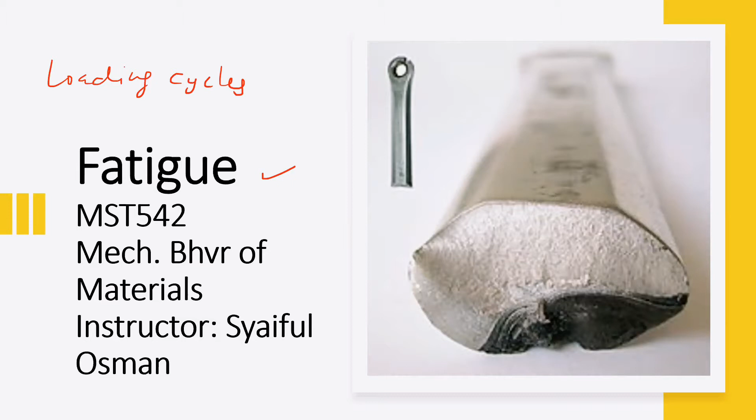Fatigue damage is among the major issues in engineering because it increases with the number of applied loading cycles in a cumulative manner and can lead to fracture and failure of the considered part.

Here is a brief history regarding fatigue. Beginning in the first half of the 19th century, mechanical failures were observed to take place in metals and materials subject to repetitive stress well below the yield strength. The theory came to be that the metal became tired or fatigued, hence the term fatigue or metal fatigue.

So how can we define fatigue? Fatigue by definition is a form of failure that occurs in structures subjected to a fluctuating stress. Among the key points to understand fatigue is that it can be defined as a form of failure that occurs in structures subjected to dynamic and fluctuating stress.

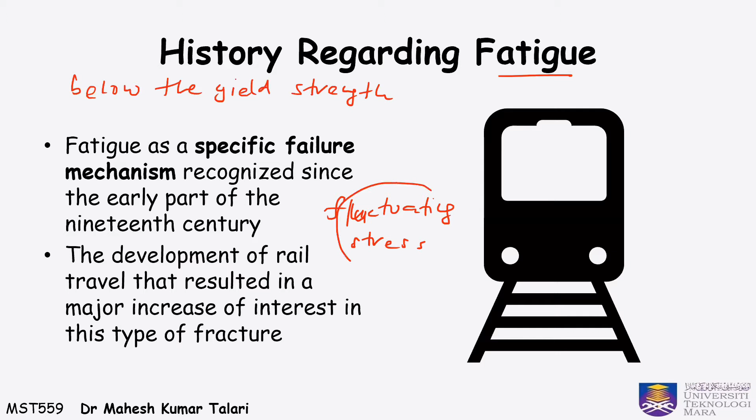It can cause part failure, responsible for about 90% of mechanical engineering failures. In addition, it occurs suddenly and without warning, and is brittle in nature, even in ductile materials.

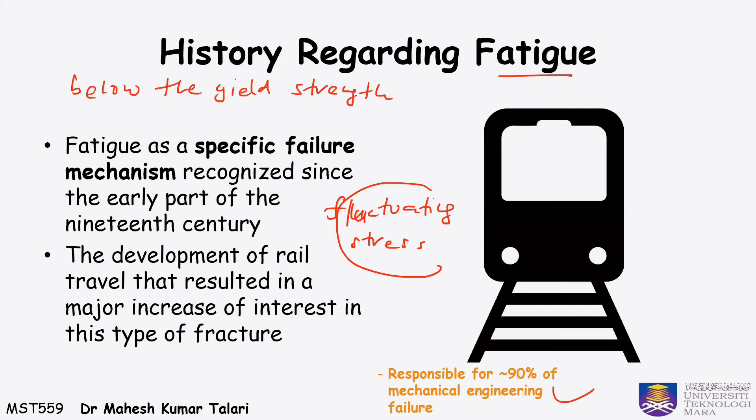For example, imagine a bridge with cars driving repeatedly over it. The number of cars in any given day might differ. One thing about fatigue you have to remember is that a part or material can fail even though the maximum stress the part is subjected to is much less than the yield stress.

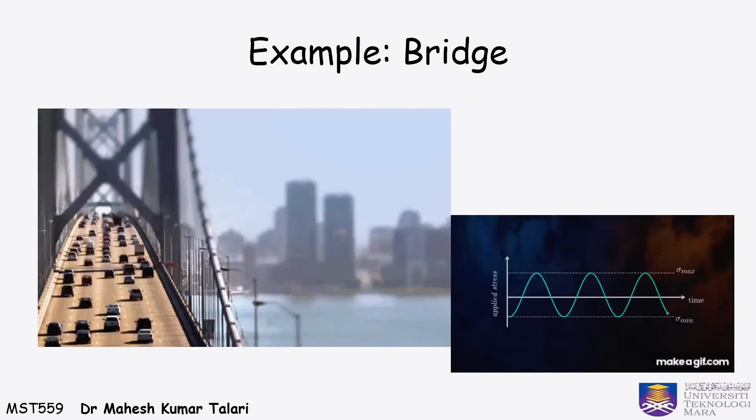So we can say that fatigue is forces equals f(t), where any forces that we apply over time will cause crack growth that will further promote premature failure.

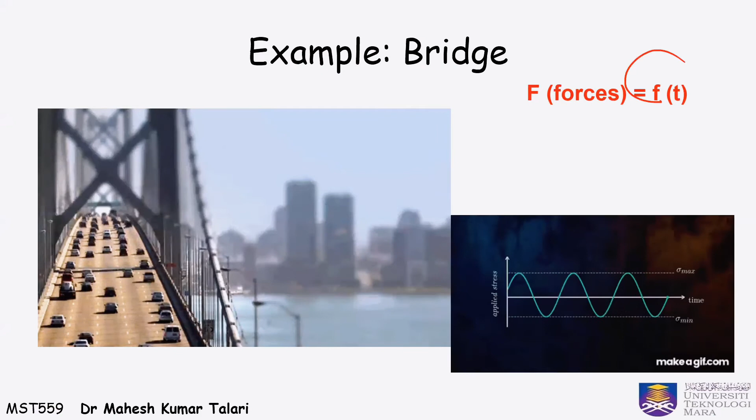So how does fatigue start? Usually we start with some kind of crack initiation. This can start by a tiny micro crack, or the way the material was arranged, etc.

At some point, we need a site for this crack to start to grow, and as our load varies over time, that crack is going to get bigger and bigger with each cycle. Eventually, this will proceed to a brittle style of fracture, and this could even happen for a ductile material.

Something like aluminium could suddenly fail with no warning. That is atypical for ductile materials, which usually exhibit a lot of deformation before failure.

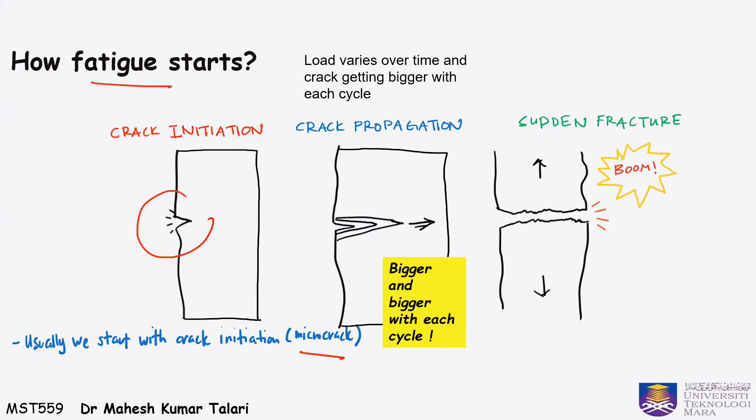So we can say that there are three stages involved in fatigue failure. The first step is where crack formation occurs. The second stage is where growth occurs, and finally the third stage is when fracture occurs.

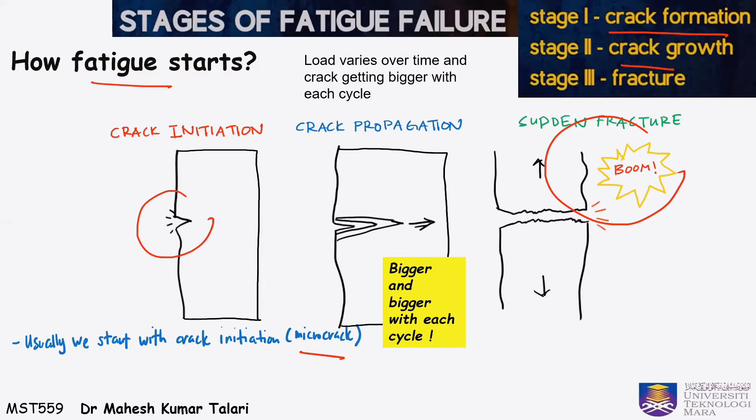Here are some important fundamentals if you want to understand more about fatigue. First, the terminology is fatigue itself. Fatigue can be defined as the lowering of strength or failure of a material due to repetitive stress, which may be above or below the yield strength.

Secondly, we have creep. We'll be discussing more about creep later. Creep can be defined as a time-dependent permanent deformation at high temperature occurring at a constant loading or constant stress.

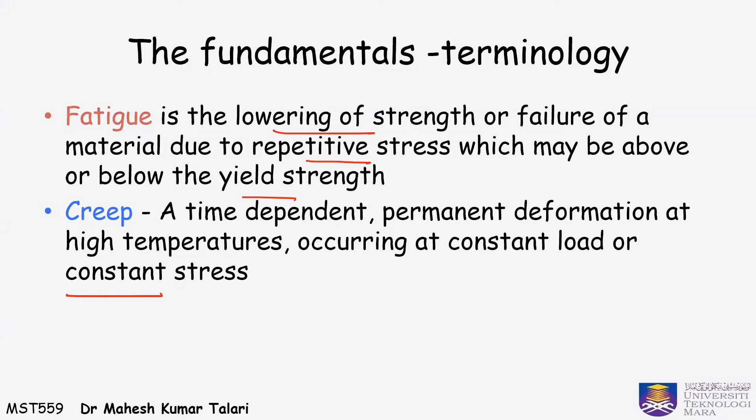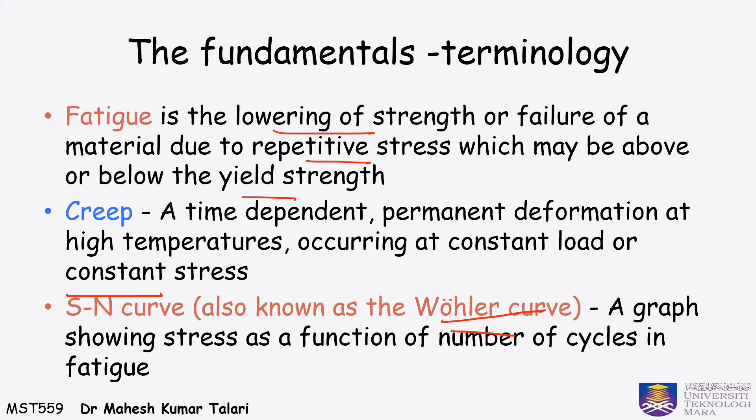You also need to know about the SN curve, also known as a Wöhler curve, which can be defined as a graph showing stress as a function of number of cycles in fatigue.

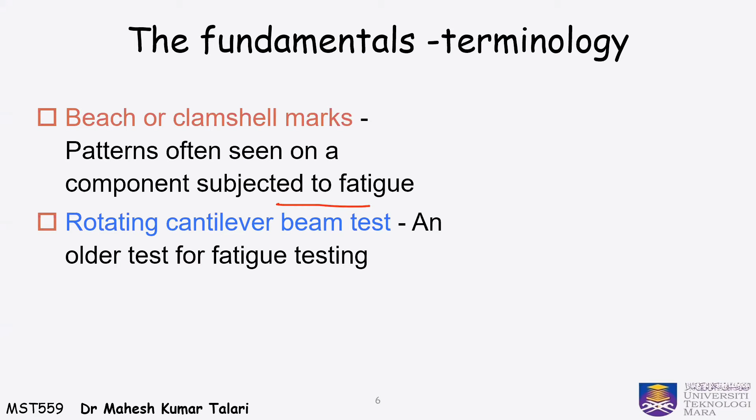You also need to know about rotating cantilever beam testing. This is a technique used for fatigue testing. Rotating beam fatigue testers are one of the oldest methods used to determine a material's fatigue behavior.

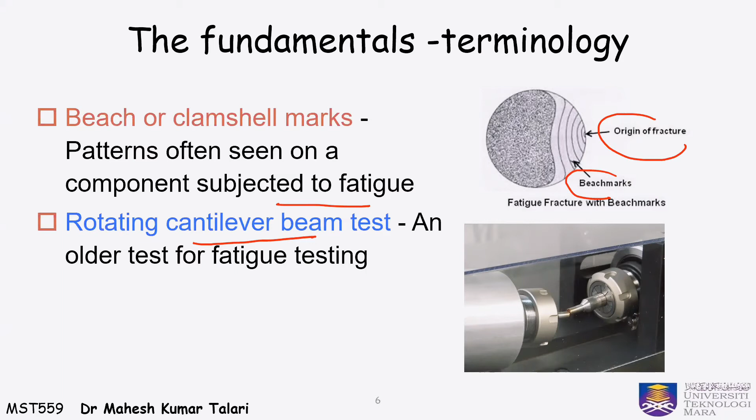So we already know that fatigue is a failure mechanism that involves the cracking or fracturing of materials and structural components due to cyclic or fluctuating stress. While we apply a stress, maybe in the form of tensile, compressive or torsional, crack initiation and propagation are due to the tensile component.

One of the interesting facts about fatigue development is that, as I've mentioned several times before, fatigue cracks can be initiated and propagated well below the yield strength of the material.

So how does fatigue failure look like? A fatigue failure is quite easy to identify, like what we can see in the figure here. The fracture surface, particularly near the origin, is typically smooth.

This fatigue crack always initiates at the surface, at stress concentration points such as surface defects, sharp surface features, etc. The surface becomes rougher as the original crack increases in size, and may become fibrous during the final crack propagation.

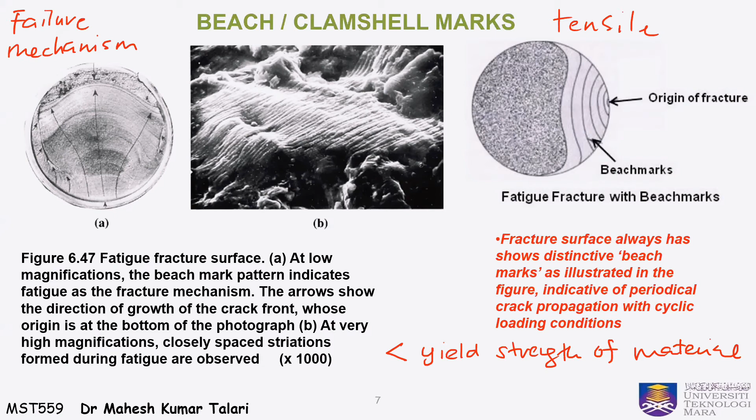There are several factors that may influence the fatigue strength. Among these factors are the range of stress, the geometry of the component, the material properties itself, and finally environmental factors such as thermal and corrosive conditions.

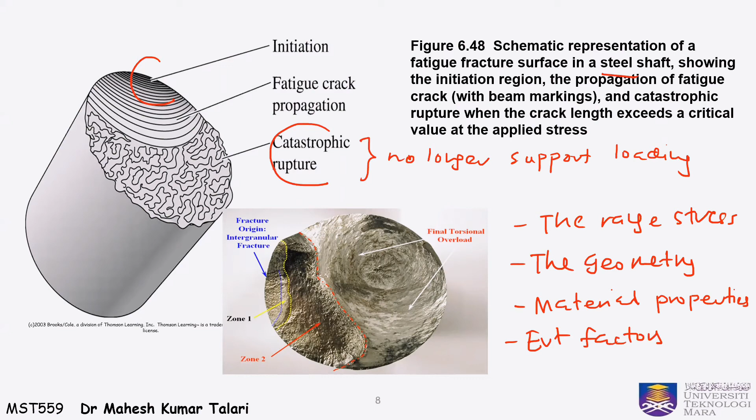So fatigue failure occurs under dynamic loading conditions, and the crack propagation progresses with each loading cycle. This slow crack propagation is often undetected until the final catastrophic failure happens in the industrial component.

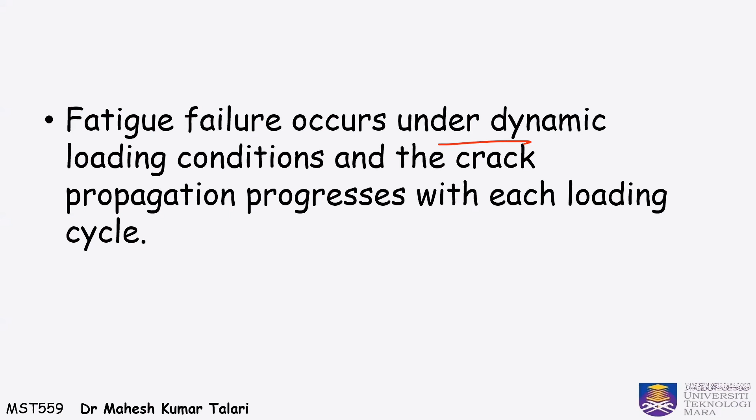So crack initiation occurs at the sites of stress concentration, such as microcracks, scratches, indents, interior corners, dislocation, slip bands, etc. Hence, the quality of the surface is important if you want to avoid fatigue from propagating.

When it proceeds to stage 2, faster propagation perpendicular to the applied stress occurs. The crack grows by repetitive blunting and sharpening processes at the crack tip, producing a rough surface. Finally, the crack eventually reaches a critical dimension and propagates very rapidly.

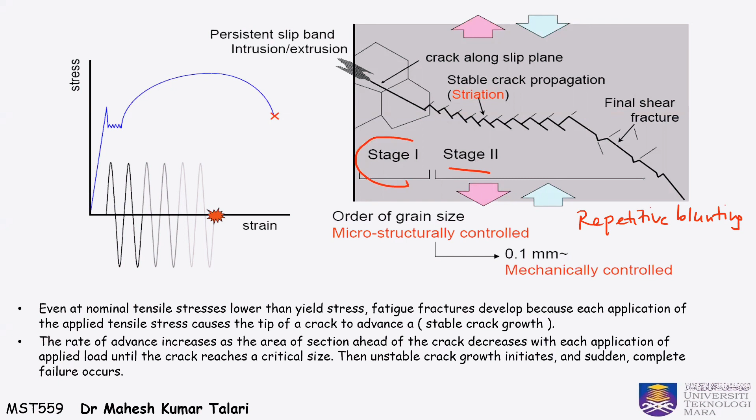So we already know how fatigue happens in materials. A load of insufficient magnitude to cause failure in a single application may lead to failure if it is removed and reapplied repeatedly.